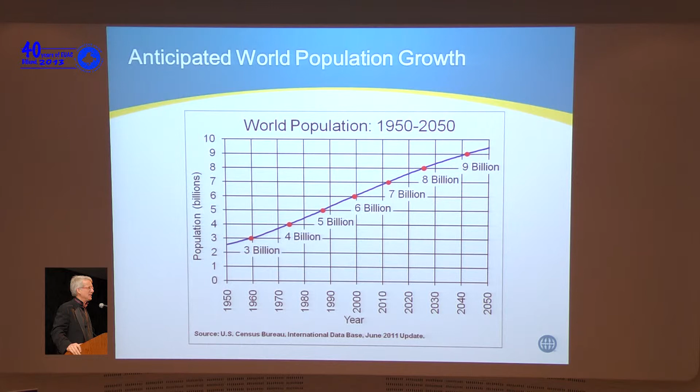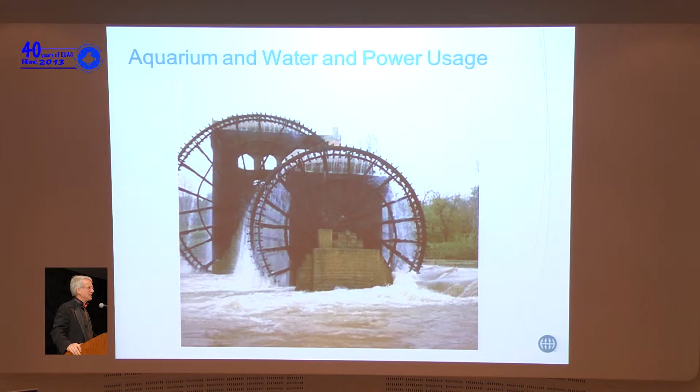The population in the world is growing, and with increased population, there's demand on water and power, and aquariums are big consumers of water and power. The life support systems usually represent around 50% of the power consumption of the entire building. So the life support system is a big piece of it. And so to be truly sustainable, we need to always be thinking about ways that we can reduce the power consumption, reduce water consumption, and kind of push the edges of technology. And that means really kind of rethinking the typical life support system.

And so what I want to talk to you today is about one little project I've been pushing forward over the last couple of years. This presentation was given at IAC, and we've moved a little bit further with it. So for the ones that were in Cape Town, it's a little bit of a repeat with a little twist at the end. For those who weren't in Cape Town, it'll be new.

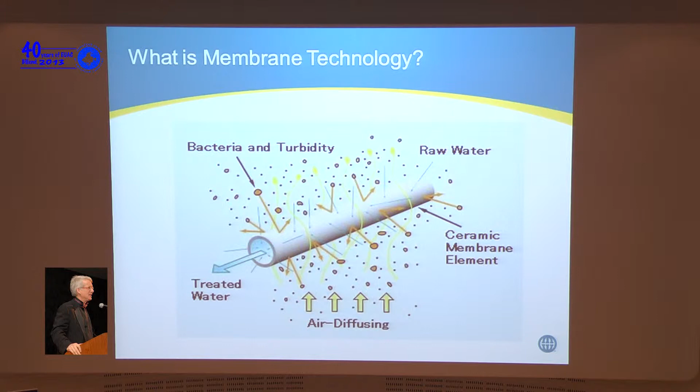But the technology in the water business overall, in the water side, the wastewater side, that technology is predominantly moving towards membranes. And what are membranes? Membranes are just really micropores. It's basically producing a filter so fine that it can filter virtually anything out. And there's different types of membranes. The ones that we're mostly familiar with are RO membranes that basically can filter all the suspended material and almost all the ionic material out of the water and produce fresh water.

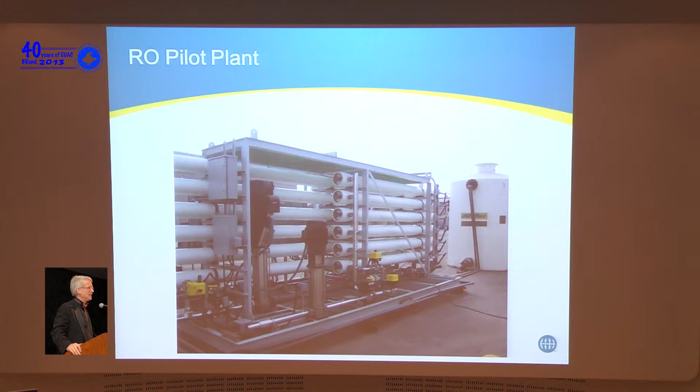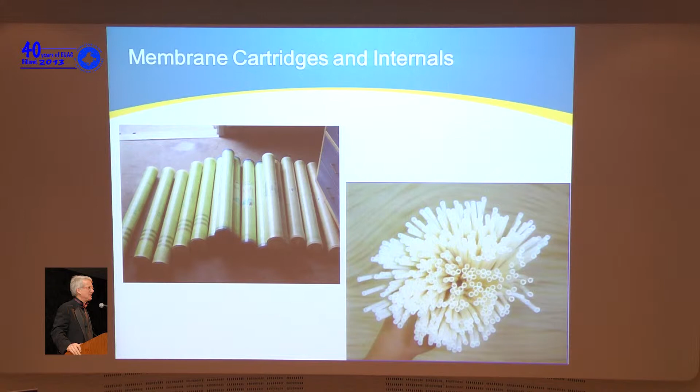So there's a lot of technology being developed in that area because there's water shortages. And so there's been a lot of studies of those reverse osmosis membranes. But there's other types of membranes also that don't filter down that far. Obviously in an aquarium, we don't want to remove the salts. We don't want to remove those ionic materials. And so we're trying to get a larger particle size.

And so as we looked at what kind of pushes the technology and we started looking at membranes, we said, membranes can get down to the salt, so you can remove, obviously, the suspended material, but what size membrane do we really want? And the size we're focusing on is really the 0.1 or 0.01 micron range, which is the ultrafiltration range. And the advantage of the 0.01 micron range is that it knocks out all the suspended material, so it knocks out the visible range, so it produces clear water, but it also knocks out all the bacteria, so it's a sterilizer without any oxidant, and it knocks out almost all viruses.

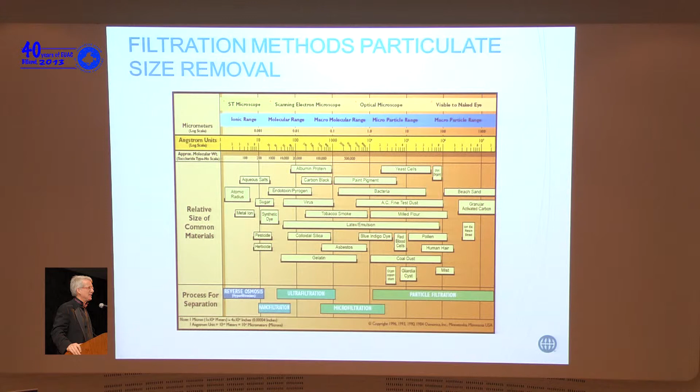What it doesn't knock out is long chain organic compounds, so it probably doesn't knock out color. In order to knock out color, we've got to take it down even further, and so it has some limitations.

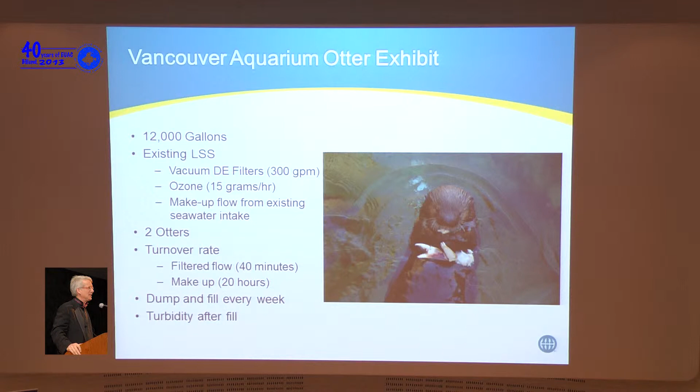So what we did with Dennis Thoney from the Vancouver Aquarium is we set up a pilot plant to kind of test membranes in a real-life situation. So we picked an otter system that was an existing otter system at the aquarium. It was a small sea otter system, had DE filters on it and some ozone on it, and so that was kind of the system that we chose.

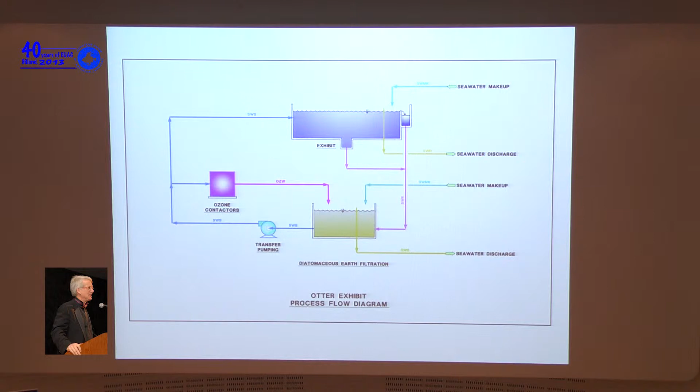The existing system is the tank, and it flows into a DE. It's a vacuum DE system, so it flows into a DE filter, pulls out of the DE filter back to the exhibit with a small ozone loop. So it's a fairly simple system, a semi-open system. And all we did was we took a small pilot system and we pumped parallel to the DE filter just to see how it was going to perform.

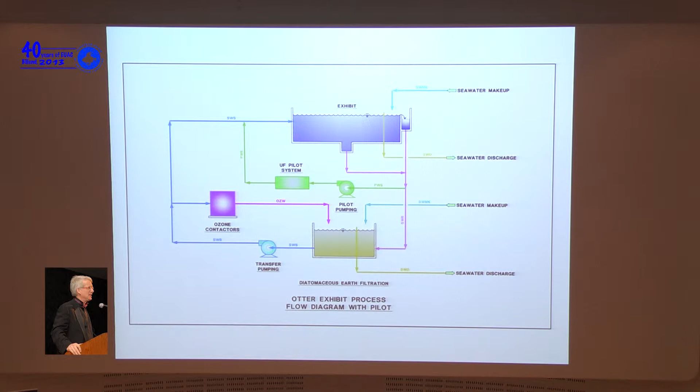So the pilot system, we actually tested a number of different membranes. The goal of this really wasn't to test the membranes, so we weren't trying to optimize the membrane. We were donated the membrane pilot plant by a firm called Sanitherm in Vancouver, and so they were able to fit this with a number of different types of membranes. We had a ceramic membrane, there was a plate membrane, we had a hollow fiber membrane, which is a tube membrane, and so there were a number of different tests on those different types of membranes.

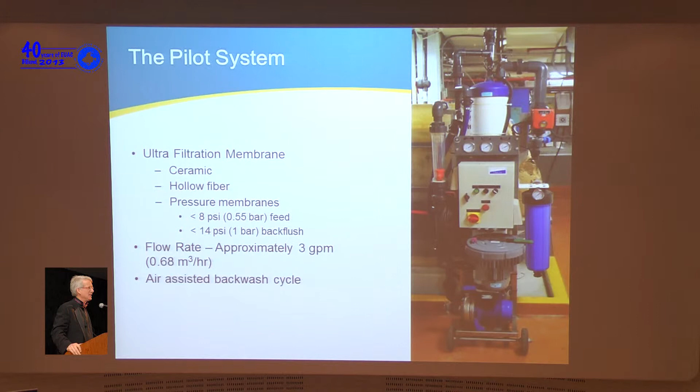But we pumped the water through it, and then we measured particle counts and turbidity and coliforms, and we wanted to measure viruses, but we didn't have a big enough budget to measure viruses, so we made some assumptions on viruses. We had it in an automatic backwash mode, and so what you're seeing is a 3 gallon a minute, or 0.7 cubic meter an hour, filter system. And so you can see it's got a lot on it. It's a lot more than a sand filter.

So what were the results? So this thing knocked out virtually all the turbidity, which is what we expected. It was a 0.01 micron membrane, a hollow fiber. It knocked out all the coliforms. I couldn't see any coliforms out of it. And because this is sea otters, you're seeing coliforms in, coliforms out. Again, we assumed it knocked out the viruses.

We did particle counts, and we could see which size particles it was taking out. The particle counting wasn't really very conclusive to us. I mean, obviously it was removing particles, but with the particle count technology, we didn't have a continuous measuring analyzer, and it was really not too accurate for us. And so we ended up using more accurate turbidimeters to get the ultimate result.

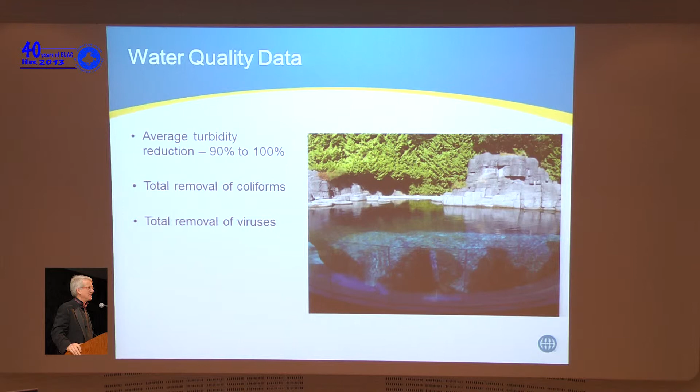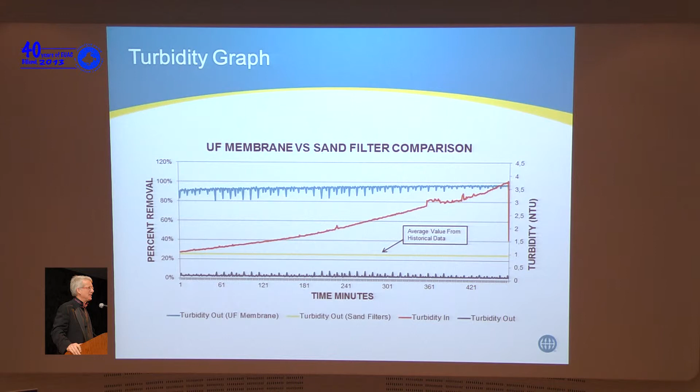0.05, essentially 0. Now the little yellow graph there, I just threw that in there. That's kind of what we normally see for a sand filter. So a sand filter might be able to remove 20%, and we're seeing essentially 100% removal. And again, associated with this was coliform removal. So it's acting as a sterilant.

So what were the problems? There were problems with the unit, obviously. This is kind of on the edge. It was backwashing very frequently. It was backwashing a lot. Boom, boom, boom. And it has an auto backwash sequence to it. It goes through a backwashing sequence.

And so it was losing 45% of the water. So of the water going in, you lose 45%. So obviously that doesn't work in a true aquarium situation. So we had recovery issues. But it was definitely removing the stuff we were concerned about, which was the turbidity and the coliforms.

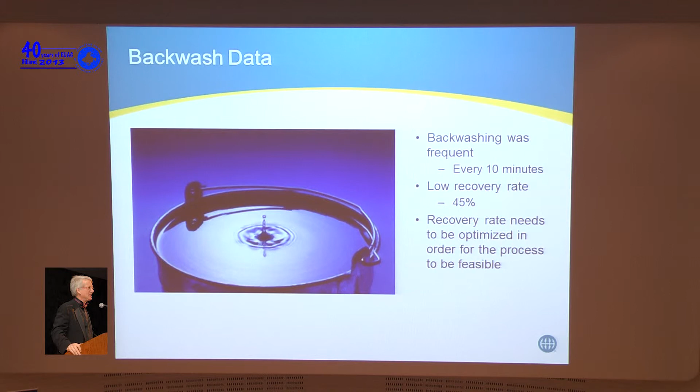So what was the next step then? So what we decided was, in order to make this work, we've got to scale it up. And so we decided to scale it up and see if we could reduce the water usage. And there's a couple of things involved in scaling this up.

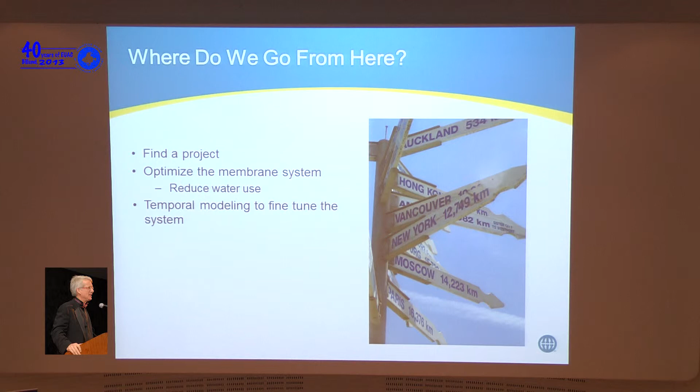One thing is that if you view this membrane system as a replacement to sand filters, it'll never replace sand filters. The reason it'll never replace sand filters is because it's way too expensive. And so you've got to view it in a bigger sense of the whole system. And if you don't, then you'll never use membranes, because a membrane system is much more complex than a sand filter system. So you've got to view it in its entirety.

So what did we choose to go to? We decided to put it on a hippo system, or at least look at putting it on a hippo system. So you go, what? Why a hippo system? I mean, hippos are about as nasty as you can get. They're worse than sea otters. There's a couple of reasons.

We were getting into the design of this hippo system at the Memphis Zoo, and membranes have actually been used on hippo systems before. There's an ultrafiltration membrane system on hippos at the Emmen Zoo, and it has been running there for years. I've been talking to some people here that have been there. I've talked to the designers and the operators of it. Unfortunately, it's shut down right now because the Emmen Zoo is being rebuilt.

So I wanted to go see it. It's a very unusual, it's a whole presentation how they used the ultrafiltration at the Emmen Zoo. But it had been used on hippos and on penguins at the Emmen Zoo. So that made me feel a little bit more comfortable.

So what we did was we designed a conventional system for hippos on this project, and then we did a parallel design using membranes, just to see whether it made any sense economically. Because obviously, it's fun to use these new technologies, but if they're too expensive, you won't use them.

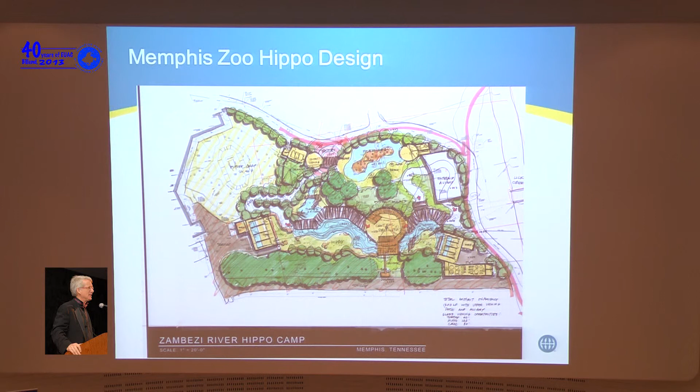And so what we had to do in order to make it work is we had to look at how this membrane system fits into the whole system. What does it take out? It's got to take out more than just the sand filters. It's got to take out other systems. It's got to reduce the size of something in order to make it work.

And so we have this mathematical model that basically predicts, when you put in a treatment system that treats at 20% efficiency like a sand filter and it's recirculating around, what is the water quality that will result if you take a portion of that flow and treat it to 100%? So that's what we're doing, looking overall at how the system's going to perform.

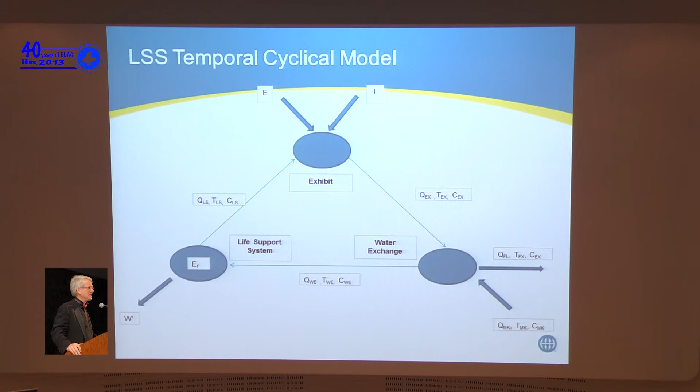And by applying that mathematical model to the comparison between a conventional system and the membrane system, it allows us to downsize the membrane system, theoretically. So we ended up with this system, which is what we compared the conventional system to. Now hippos, again, eat and excrete lots of straw, and so they're nasty little buggers.

And so it flows into a screening structure. So it's got to have a screening structure to screen out that straw. And that screening structure has to be there for a sand filter, has to be there for any type of particle filtration system. So that system is in there regardless. Then we came out of the sump for the screening structure and pumped it either into sand filters or into membranes. And then because we're concerned about color, we also put it into an ozone system.

So we downsized the ozone system. We were able to scale the ozone system way back. So we cut the ozone, because all the water going through the membranes is sterilized. We don't need to get as much sterilization from the ozone. We're just trying to pop the color out, get the color out. So we downsized the ozone system, and the membrane system is just a black box.

So in this case, we went to GE Water. GE Water is General Electric, the water division of GE, and they're one of the largest membrane manufacturers in the world. And they basically put some of their techie guys on it, and they came up with a design that they thought would work. And it uses a ZeeWeed membrane, which is a hollow fiber membrane down to 0.01 microns. So it's essentially equivalent to what we were using on the pilot plant, but it's a little bit different system. And they threw that in there, and we sized the system.

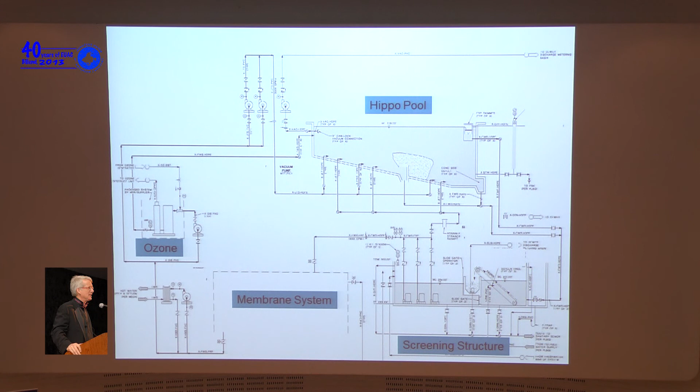The technology exists. These systems are in operation in more severe environments than what we're at. HIPPOs are pretty severe environments. So now what we're doing is looking for the next project and a client that really is willing to take a little bit of a risk, and maybe it's a smaller system than this system. But we believe that in fact the membrane systems push the technology.